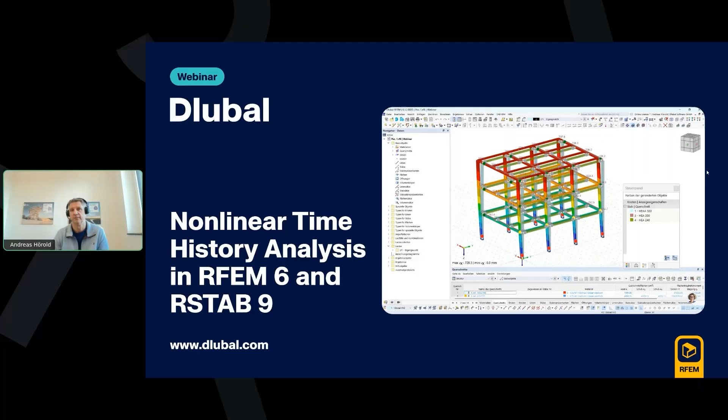The topic of today's webinar is nonlinear time history analysis in RFEM 6 and RSTAB 9. Quite a new feature. Just enjoy the webinar.

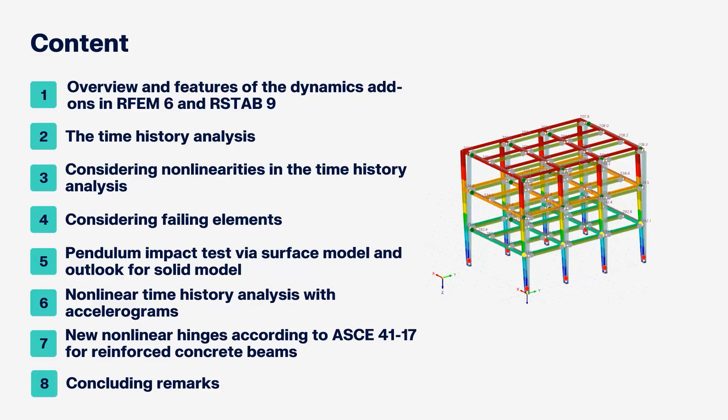So let's go right away with the introduction and overview on our features. Well, we have the modal analysis add-on, which gives you the opportunity to investigate modal properties of our systems. For example, the modal frequencies or the modal eigenshapes and modal masses in general, all that stuff. Followed up, there's the response spectrum analysis add-on.

Well, it just creates states of the system according to an eigenshape, and the states have internal forces and deformations, and we will get these results for each shape, and according to the standard they will be combined, for example with a 100%/30% rule, CQC rule, or SRSS rule. Well, the 100/30 is more for the directions, but in the end, we will get an envelope of internal force results, which can be used further for the design.

Then we will go into the first nonlinear analysis, which is the pushover analysis. At first it looks quite complex, but the theory behind it is, well, quite simple. It's two parts. The first part is just we will get the force-deformation curve of the system under horizontal load. The analysis is quite simple. We just press the system from one side until it either reaches a wanted point or it breaks.

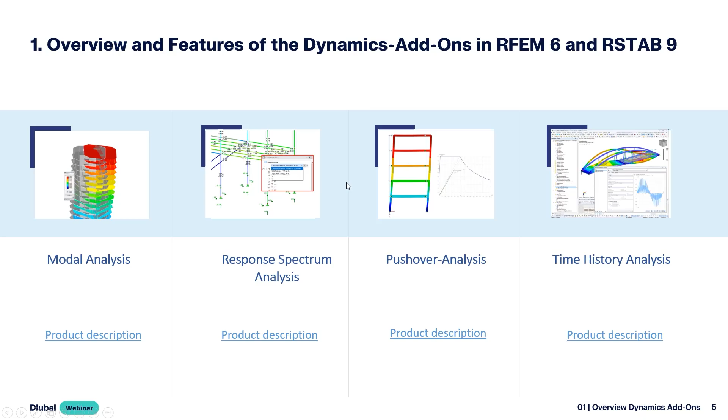We're going to start quite simple. Let's go within our program. The first thing is we're just going to validate that simple nonlinearities are considered within our new analysis type. Therefore, I prepared a simple model. It's just a column, a reinforced concrete column with, I think, 30 times 30 centimeters, 5 meters long. It's fixed at the bottom, and also we have two cables, one at each side.

And this is what we want to verify. For the masses, we have the self-weight of the system as well as one kilonewton force on top. That will be our mass matrix. And for the loading, we have 100 kilonewton, which we will apply with a simple sine function of 0.5 times t. So in 10 seconds, it will just go one time to one side and one time to the other side. What we want to verify is that the cables will fail if they are under pressure. And that's the investigation we will go for first.

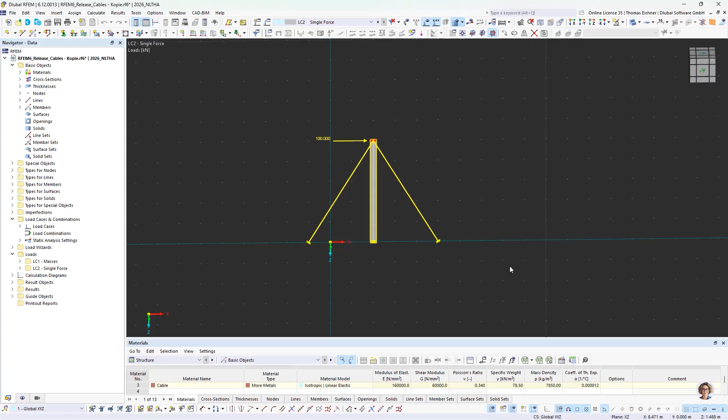For the investigation, I also want to show you what is needed for these nonlinear time history investigations. And that's quite some present, I would say. Let's go for the base data. For our add-ons, there's nothing selected yet. And if we want to go for a time history analysis, we don't care if it's nonlinear or linear. We're just going to press the time history analysis button. Well, the modal analysis is always needed as soon as you want to do anything with dynamics in the program.

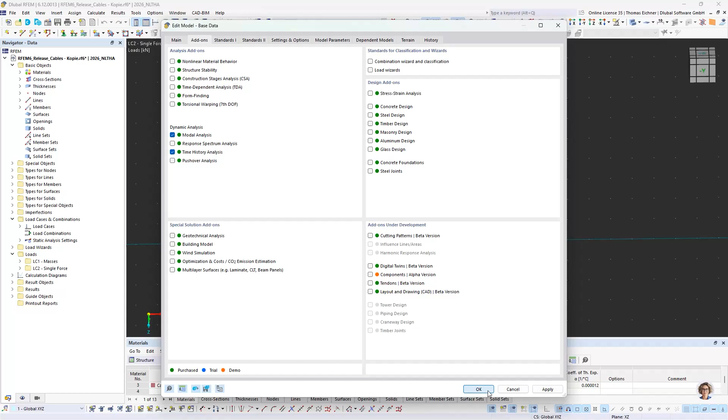But yeah, what you can see here, we don't have another add-on implemented. We also didn't change the price of this time history analysis add-on, which means if you already purchased the time history analysis previously, you're just gifted with the nonlinear solver. Also, if you would buy it now, there's no change in the price for it. So feel free to get it as long as it is like that, because that's quite a gift, I would say.

Okay, let's go out of it. We activated the time history analysis. And now we will go for the first step. We will go for our load cases. So there are the same possibilities as in the linear time history analysis. We can go for load cases or load combinations of the type time history. So let's go first with a load case of type time history. I'm going to copy this load case two, so I will also have the loading within the load case. Then we will change it to a time history time diagram. Let's name that load case time history analysis time diagram. That's quite cool. And okay, so there it is.

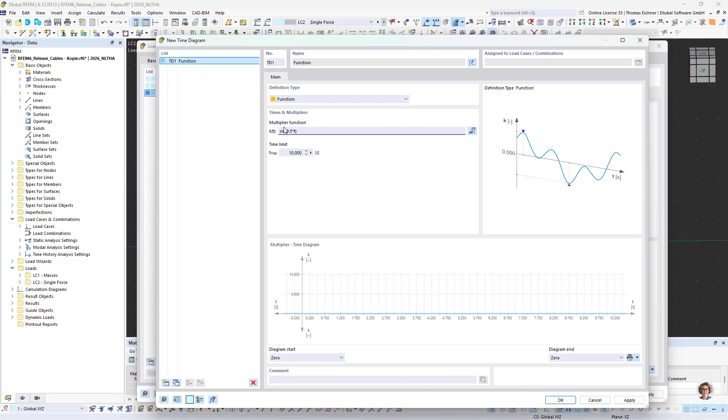We can select that. We have our masses already selected here, and we can go for our time diagrams. Well, that's quite simple. We will go for a function time diagram of, well, what's that? It's sinus 0.5 times t. Always consider only using points here and not commas. Commas are used for other functionalities in this function. But yeah, we will go for 15 seconds here.

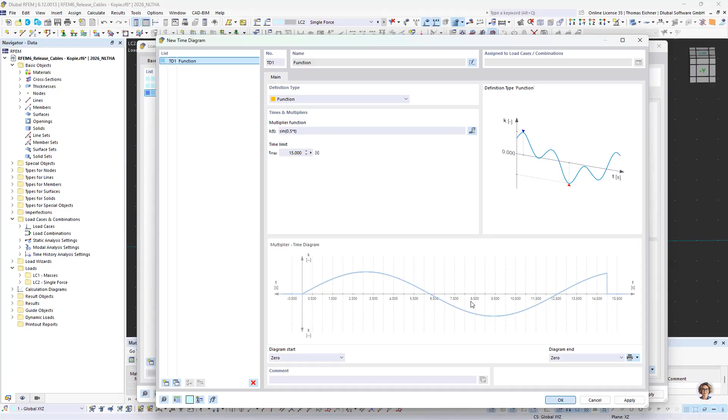So we have all there, I think, but we will only calculate until 13. That will be enough. Whatever. The time diagram max limit will be 15 here. So we have two, both here, one in each direction, just for the verification then. Okay, there we have it. This single force load case time history analysis time diagram. It's a long name. Let's delete that.

Okay, now we will go for our time history analysis settings. So maybe just one benefit here. Let's set the linear one first. So let's see, we have the linear with 13 seconds. We have a time step of 0.1 seconds, which is saved. And the saved time step, we will split it even further by 1000 steps. Since we also have cables in the systems. I think the basic division of members is 10. So we have 10 divisions for members, and cables make it quite, let's say, unstable. So we will use quite some time steps in that case.

For the calculation parameters, I don't really care about the rest. We will only go for the x direction here, and that's all. We can stay with the consistent matrix, even though it wouldn't make any difference with the diagonal in that case. Then we will go for the damping. The damping, well, I just selected. There's not too much physical meaning behind it, but I can try to get a physical meaning out of it. Let's say we have a frequency of 100 Hertz. I'm not sure if the system has an eigenfrequency of 100 Hertz. I have no clue, but let's assume it has a frequency of 100 Hertz, which would dominate the structure's response. So I want to dampen this frequency by 10%. It's quite some high damping, I would say, but that's the thinking behind inputting that value.

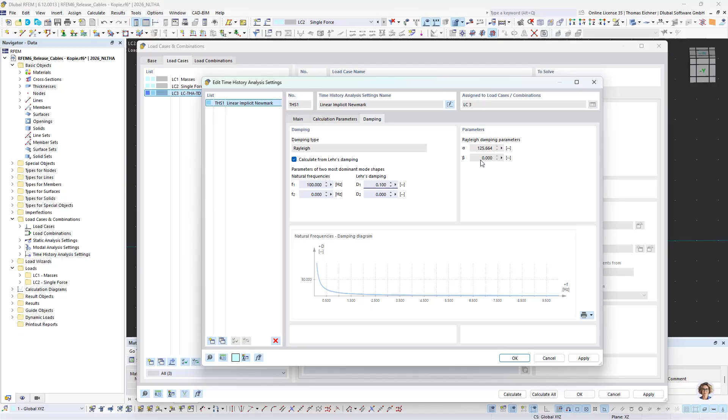Okay, for the beta damping, I try to avoid it, to be honest, since it often causes convergence issues currently. So also maybe a tip for you, if you get issues with a time history analysis, with a nonlinear one. In the linear, it's no problem, but with the nonlinear one, try to set the beta value to 0 and try it again, and then you can investigate the results, and then you can adjust it. That's always a first support step I do at customer models. Okay, but that's it. It's already done here.

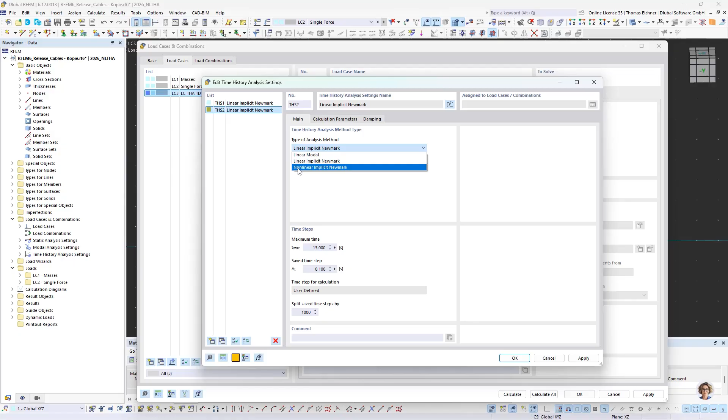What we will do next is we want to do a nonlinear time history. That's all we are talking about today. And it's quite simple. We have the linear settings done. We just copy it and we just change the solver to the nonlinear implicit Newmark one. And it's finished. So that's quite straightforward and simple. If you have some systems to test it, just try it out. But also maybe try increasing the time steps as well and play with the beta damping as well, please. That will help a lot. Okay. Now we will just accept it, and I will just directly select this nonlinear solver for this load case.

For the next load case, I want to go with a time history analysis of accelerograms. So with that, also the nonlinear solver, also the same masses, we can select an accelerogram from our library, like anything there, Chile, I don't know, what's that? Let's go for some 16 seconds. That's okay. Let's go for Valparaiso aftershock. Okay, for the Chile earthquake. It's quite small. That's okay. Just going to take it, just to have some accelerogram time history as well in that calculation. Okay, and so with that we have all possibilities of the load case time history analysis.

Now we also go for load combination time history analysis, and that's like my favorite. I'm almost only working with those load combination time history analyses for time diagrams. They are not available for accelerograms, but for time diagrams, I almost always take load combinations. The thing is, we can just do more with it. Right, the load cases are okay, but we can only assign one loading with one time diagram. In the load combinations, we can do the same, but we can also add another loading with another time diagram. So in the end, this is the same as the load case time diagram time history. And that's the same setting right here. We just have one time diagram and one load case assigned.

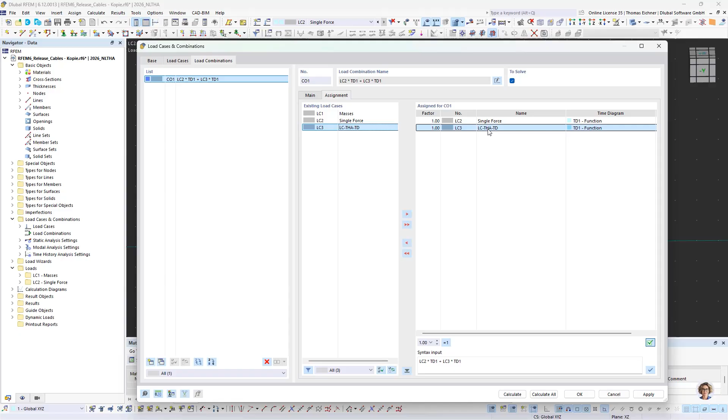We could also go for this direct. We could use that, and it's automatically filled with the right time diagram that is used in this load case. But we don't need that. Okay, so here we will go for the differentiation. We will make one for the linear time history analysis, and we will also go for one for the nonlinear one. So let's call it COTHA time diagram.

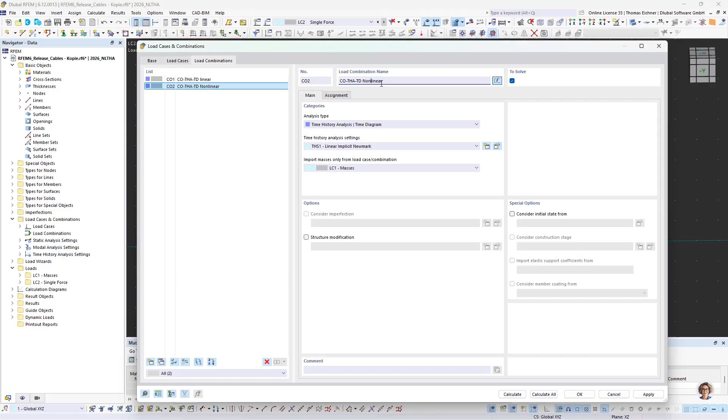Linear. And the second one will be the same but nonlinear, and we change the solver there. And well, quite straightforward, that's done. Let's just calculate it.

And since it's gonna take 3 minutes and I really want to show you some stuff today, I want to just first show you we have 4 time histories. They are all done at the same time, calculated at different cores. That's a difference to RFEM 5, where it would all need to be calculated one after each other. So it's quite a ton faster than the other variant. However, I really don't want to wait this long. Let's just switch to my prepared results model. I also prepared all the results for our further models since it's needed.

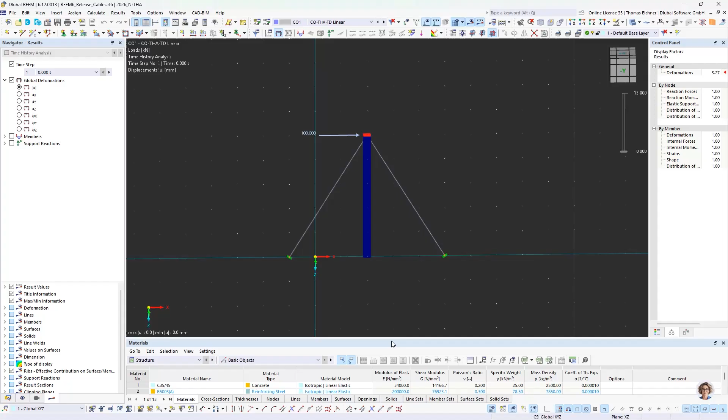Let's go for the results of this time history. We will start with our load combinations linear one. For your information, the best way to investigate the results is either using these calculation diagrams, which I prepared here already. For example, we can see the maximum deformation in the graph. Just select the time history analysis here, so you can have the result type time here.

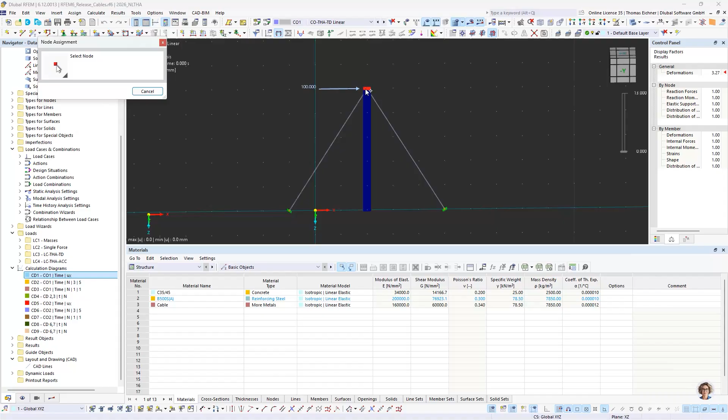Let's go and create a new one for, let's go for the load case 3. No, we want to have the linear load combination, just as an example for creating those time diagrams, those result calculation diagrams. We will go for members, internal forces, normal force of this cable. So the thing is, we wanted to see if it's failing. And since we are in the linear time history analysis, we see it's not failing. It's first gonna take tension force, and then it's gonna take pressure. So the pressure is just wrong. It should fail here, right? And that's the thing. But we will go for a different investigation now.

Don't need to change this. No, don't need to save this. Let's go for our calculation diagram monitor, which is right there. That's a cool thing. We have the same diagram. We have the possibility to show one calculation diagram while we are in the program. And also, if we now start the animation, we can see it right there. It's also going to show us where we are at. And there you also see the normal force of this cable right now. Well, it's just gonna hold it completely with tension and pressure, and that's wrong.

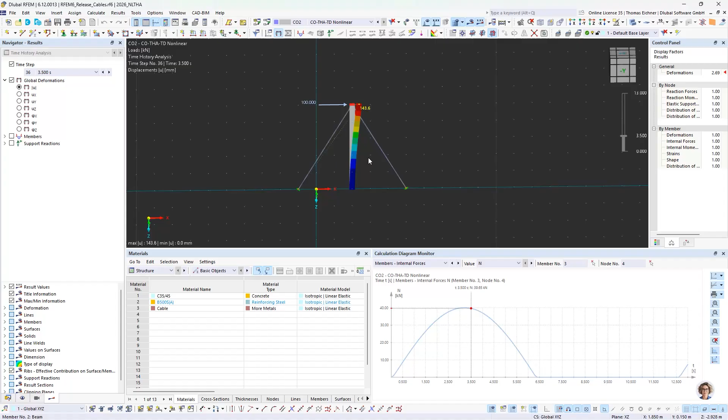So now for verification, quite simple. I'm gonna select the load combination 2, and there we have it. There's only tension force, and it's failing at the pressured region. So let's start the animation on that. We also see it's running quite better here. We also have way different deformations. Well, not way bigger. I mean, in the end, it's still fixed. It's still a column here, but yeah. That's the validation there. Validation is done already.

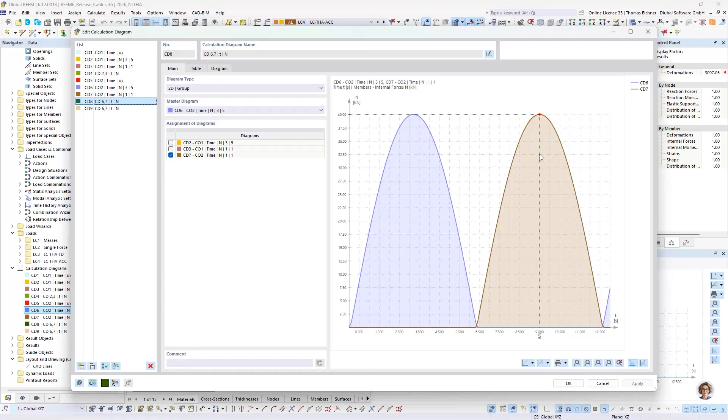We can also go for a short second. Let's see at the load case time history analysis accelerogram. We also see here there's only tension forces, never negative normal forces in the cable. So confirmed again. One more thing I want to show you. Let's go for the load combination 2. This is the normal force for the left cable, and this is the normal force for the right cable. We see it's working as estimated. Also, we have another thing, and it's called the group diagram, where we can combine now this diagram 6 with the diagram 7. So the normal force of the left cable with the normal force of the right cable. And that's quite handsome.

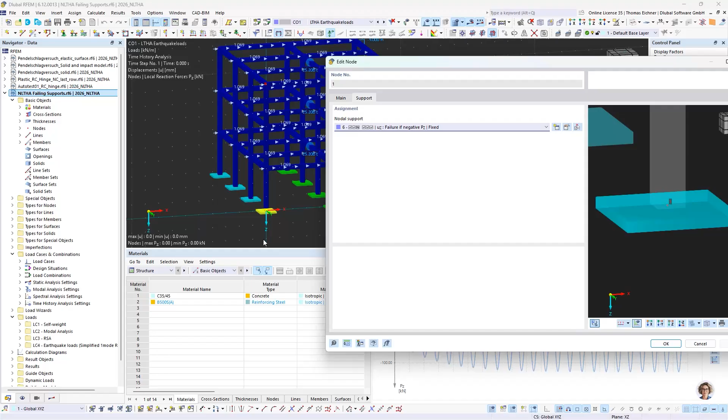Okay, so first investigation done. First non-linearity is successfully confirmed. Let's go for the next confirmation, and that's gonna be some failing supports. Here you can see I just prepared a model which has fixed supports, but it has failing supports if the force is pulling up. So if this Pz is negative, then the support fails. Quite straightforward here, and we already see the results of the linear time history with the results of the support force at this left corner here.

We see the loading. Well, there's just one fail I did. I have two loadings that are a bit different, but it doesn't make a big difference. It just is a bit not anti-metric because of that. Let's see how it's going. I'm gonna start the animation, and we can see now the supports always take support forces in both directions, as also stated in this diagram.

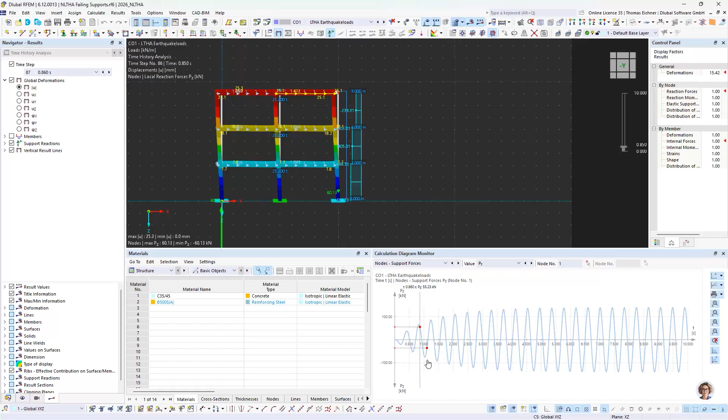What I did here is I just used time diagrams. I did quite some theory crafting, I would say, on this model. What I did is I just used the first mode. So the first mode of the modal analysis is used here. It's the 15.236 rad per second. So it's not the natural frequency, it's the omega of the first mode of the linear system.

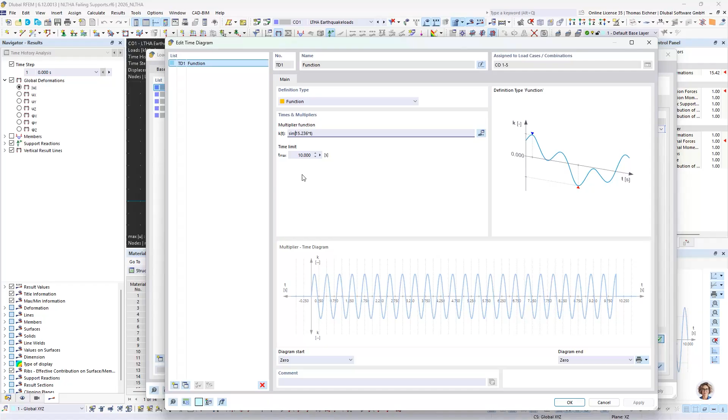I used it here and just applied the loading. I just applied the masses in x direction. That's what this time history does for linear and for nonlinear. So the same I did for the nonlinear time history analysis.

So let's see here. As we see, it's just like opening up. I also included some damping. So we see it's just like rising. It's always starting up, and then the damping comes into place, and it stops rising. I'm just missing a word for that, but that's no problem. I think you know what I mean there.

So let's switch to the nonlinear time history, and we would estimate, there we see it, we would estimate these forces only to be positive. Let's go and see it. Yeah, and there it is, only in one direction. Here it's shifting. Here it's shifting.

Okay, we're gonna increase the deformations by 100, to see quite better. Now we see, it's lifting up, and it's going down again, and then this side is lifting up. So the nonlinearity is confirmed by that investigation. And now we can continue with, let's call it, the good stuff. For the good stuff, we have the pendulum impact analysis, or simulation in this case.

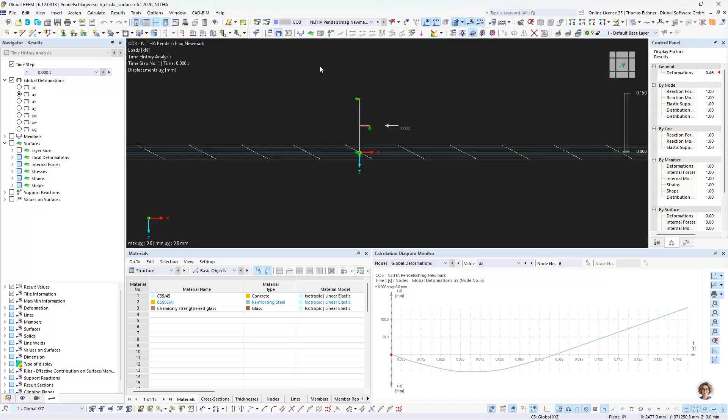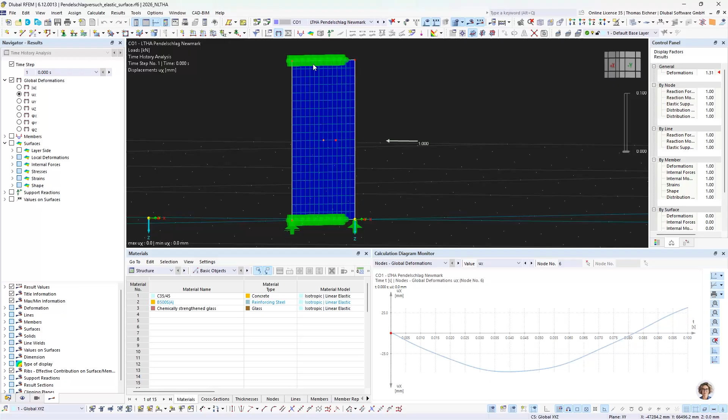Now I want to go, let's see here. Okay, perfect. Let's see first about the system. What we have there should be a glass surface. It's just one surface. It's a chemically strengthened glass, 8 millimeters of thickness. We have 1 meter height and 70 centimeter length. And we have it supported on top and the bottom with line supports.

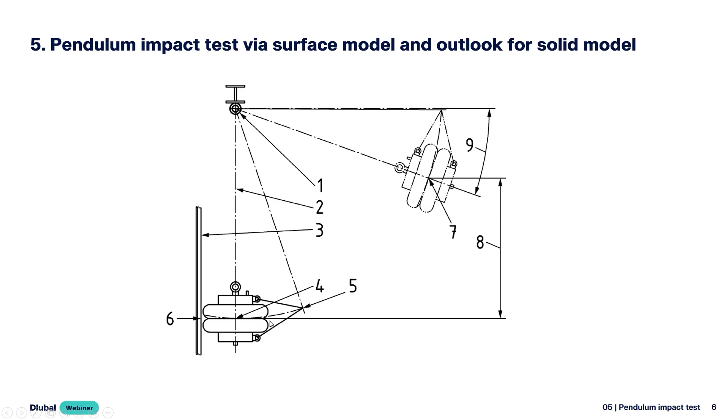And the real procedure is we would have it hang up here, lift it up, and then it would be let loose and it would bang against the surface. It would just bang and then it would go back again. It wouldn't go there and then go there again and again. That's not what we want to simulate. It would just bang once, get away from it, and then it's away. That's what we want to simulate. So for the energy, we will see this in the results in the end.

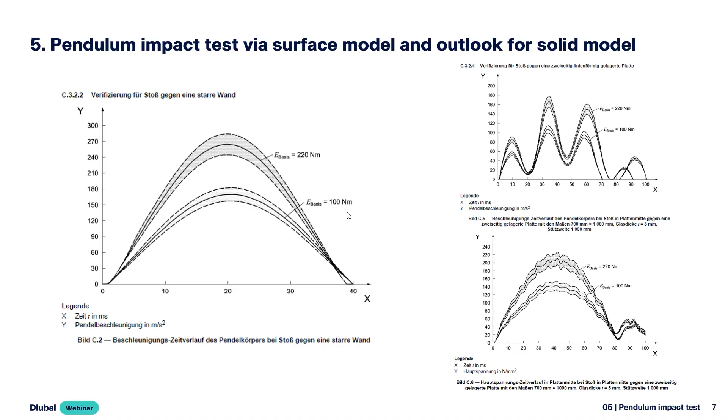However, what we can see here is we will go with an impact energy of 100 Newton meters. So what we want to have is at the impact, we want to transfer 100 Newton meter energy. So how can we achieve that? Well, we know we have this impact system which has 50 kilograms. That's the mass of the impact body. I think it's a tire which normally is weighted with a medicine ball, something like that. So that's the system, it has 50 kilograms, and it has roughly a stiffness of 400 kilonewton per meter. That's also gonna be in our stiffness there. So now we know the energy of 100 Newton meter.

With that, the law of conservation of energy, together with the impulse theorem, we can calculate a force F. I left out some intermediate steps, because the force F can be derived from the impulse change over time. So there are some formulas missing in between, but that's what's behind these formulas. The time which we do take, we just pick it. We decided it's 0.001 seconds. And with this 0.001 seconds and this derived formula, we can have the force that is needed to achieve this energy.

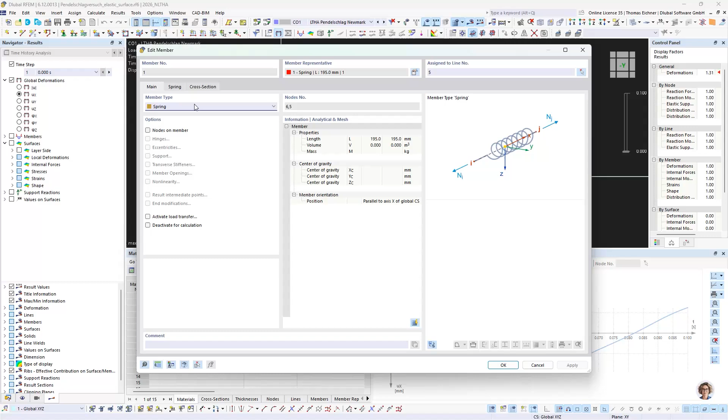Then we have the system of our tire, in this case a really simple system. It's just a spring, and the spring has a stiffness of 400 kilonewton per meter. It has no mass itself. We defined the 50 kilograms in our mass load case on one side. And we have a partial activity, which means we can insert a slippage of 1 millimeter. So that's the distance we need to accelerate to this 2 meters per second.

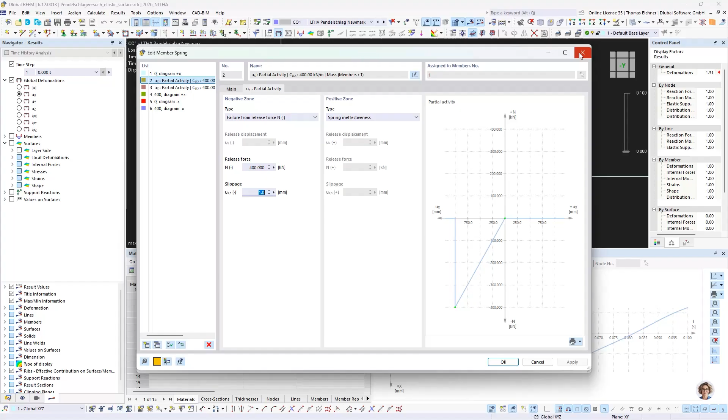And we also have a spring ineffectiveness in the other direction. So it hits, goes with the structure there, and if it goes back and is not linked anymore, then it's ineffective. That's how we make sure that it goes away after the impact. Okay, that's quite straightforward, and that's it already. Now we can go for the results, which I already calculated.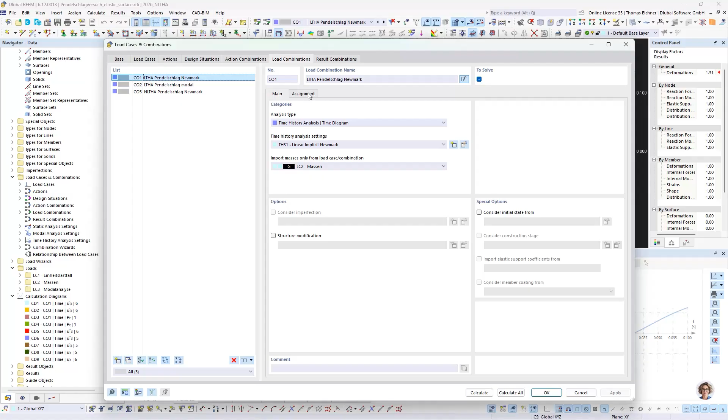Maybe we can go also for our time history analysis settings. As I said, we have the masses defined in our mass load case 2. We have our unit load case with 1 kilonewton. Now we will go for a load combination; they are all the same. The only difference will be the time history analysis solver. So we can look at the assignment. We have our unit load case, which has 1 kilonewton, and we assigned it with our Pendelschlag, which is a pendulum impact in German. There we have the 0.01 seconds, and we have this multiplier with 100. So that's what we do there.

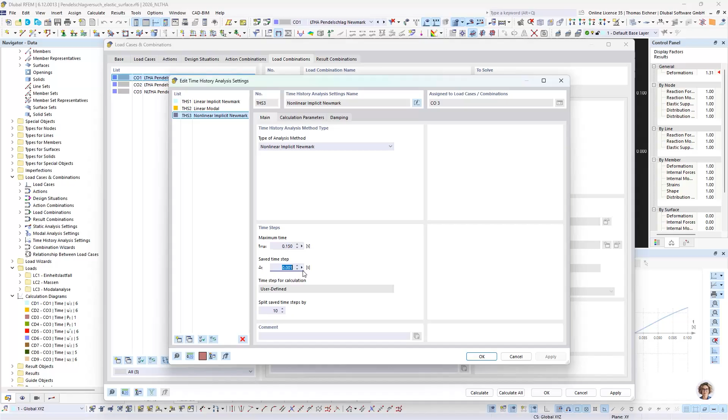Okay, done with that. We can look at our time history settings. In this case, I always picked the time steps and splits the same, but we don't need such precise ones for the linear one. However, I just picked them the same. So now we calculate times 0.15 seconds long. I think that's different, yes, I did it longer for the nonlinear time history. I will show you why. We have a saved time step of 0.001 seconds, and we will further split it by 10 to have more calculation time steps. For the calculation parameters, it's a diagonal matrix with all components.

For damping, I think we don't have any damping in this case. I didn't go for damping here. We could also try to estimate some damping, but I didn't try it yet. Okay, but with that we are done already. The modal one we can just ignore. We won't look at that. It's going to be the same results as the linear one. It just needs a modal analysis first.

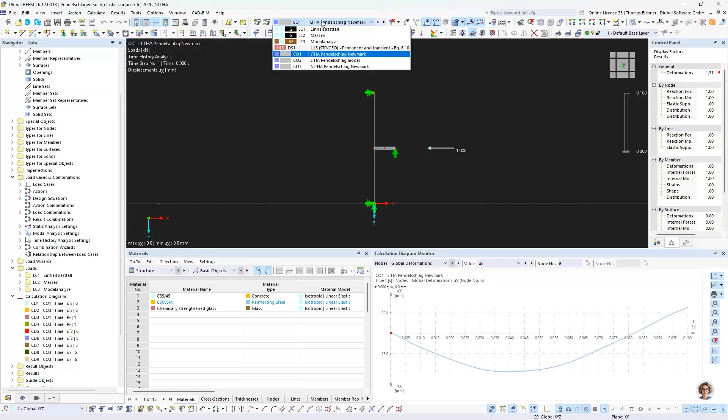Let's go for the results now. We will see the linear one, and let's see, this is the UX of node 6. Node 6 is this one here. Let's just start the animation. I will override it a bit so we can see more. Let's factor it with 5 and start the animation here. Now we see it's going to make the bang, and then it's going to rotate a bit.

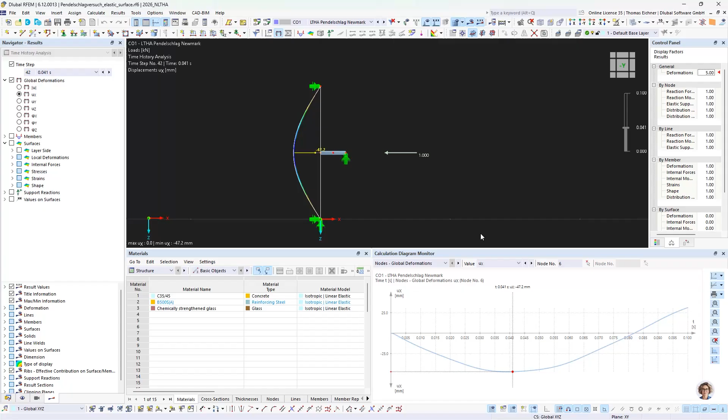The thing with the linear one is that our spring nonlinearities are neglected. That would mean it would still be connected in the end, and it would shift sinusoidally. It wouldn't be split after the impact. So this would just go up and then down again. For the velocity, maybe let's go for our time diagrams.

There we see it. We see our almost 2 meters per second, which is a bit off since we also don't have this 1 millimeter slippage. It doesn't have too much influence, to be honest, but it's just a little bit off because of that. Also, maybe a more precise time step would also help a bit.

But what we see here, we go and there it should stop. We know this negative way shouldn't occur. That means the ball comes back again, kind of, and that shouldn't be. It should be constant here. So it's not disconnected. This means it's connected with the surface and it's going to be pulled back by the surface. That's not wanted. Now we're going to look at our nonlinear time history.

And there we see some difference. It's not going to go this sinusoidal way. I mean, okay, it's 0.05 seconds longer calculated, but we also see here some change. It's not linear, right? If you change it for the nonlinear one, we see it's just linear at that point. So the deformation of that right-hand side point is just rising, meaning this pendulum is just going further and further away with the same velocity.

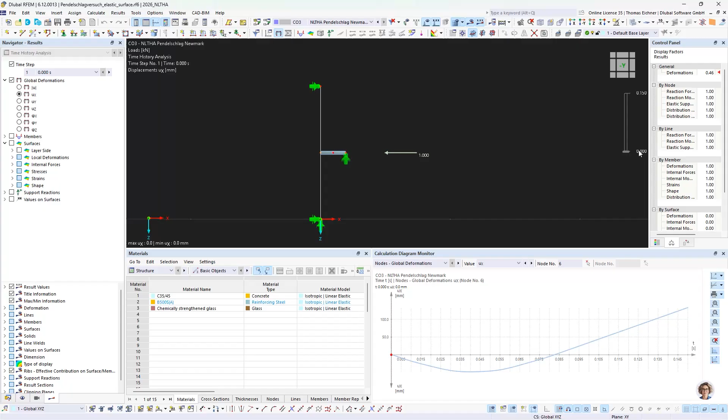We can also try to get this other point on the other side. Let's go for this. That's the point on the surface. There we see how that is going, right? It's not going further away, it's just vibrating in the end, the surface alone. We can also try to get it on the linear time history. Yeah, there, that point, well, it's connected. It's not right, to be honest. It's quite hard to interpret in that short time. Okay, let's stay with the nonlinear one.

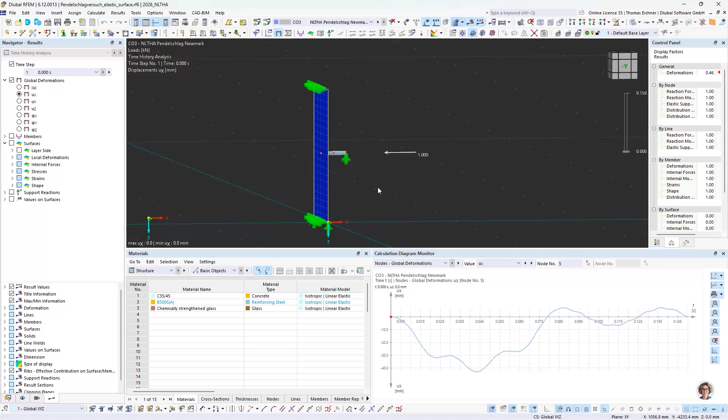And with the nonlinear one, I will stay inside that point. Let's go for node 6. Let's go for the velocities in that point. And we will go for ux, and there we will see this 1.99. It's quite close to 2.0 meters per second. That means our first theory was confirmed. We have this impact energy of 100 Newton meters, since we have this 2 meters per second. And what we also see is this constant velocity in the end.

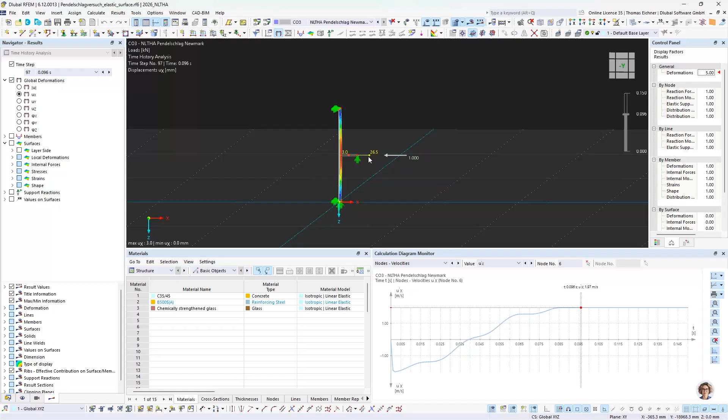That means at that point, they are not together anymore, and the system on the right-hand side, the pendulum, is just going to travel further and further to the right. Let's look at it also. Let's do it a bit bigger. There we see it. Now it's kind of together. The stiffness plays a bit of a role in the difference here, and then we see it's going to move. And yeah, it's working quite fine.

We can also change the animation speed here a bit, so it's a bit too fast. Well, now it's not fast enough. Let's go here. Yeah, that's a bit better. There we see the stiffness just has some impact here for the relative motion between those. Now it's going to shift and just move away. So that's confirmed again. So let's jump to the next model.

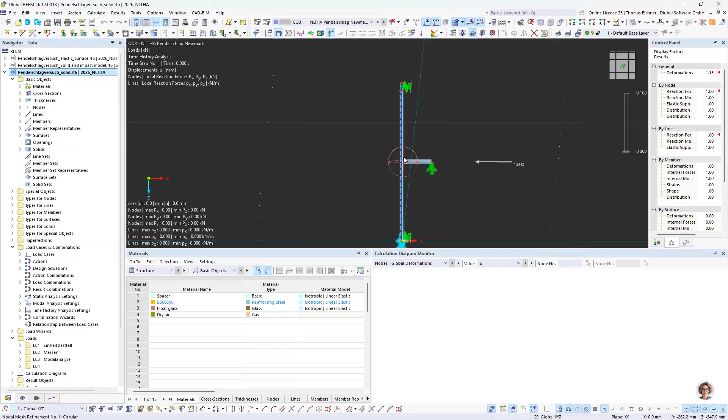It's the same model, but it's cooler. Now on that model, what we did is we included, in that case, double glass surfaces on both sides, and in the middle we have air as a solid. So this is the solid model of this structure. It did need some mesh refinements here, and I did some iterations for getting the results as they are now. We will just go straight forward, and we will go for the nonlinear time history analysis,

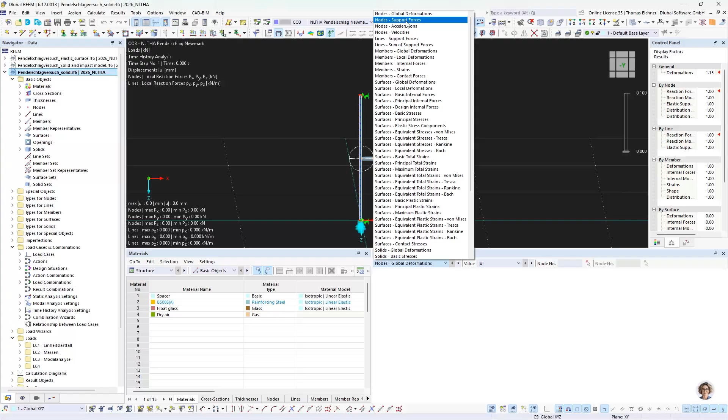and we will go again for our velocities on the point. And we will see quite the same. You see, in that case, it's again only calculated till 0.1 seconds, not till 0.15, but we see how it's not changing at that point anyway. So that is also working quite fine. We also have this 1.99 meters per second, so that's quite nice.

Let's go for the animation in that case. We also see how it's moving the whole body here. This whole solid model is going to be moved and it's going to go back. We see this behavior is a bit different to the surface model, especially since this is way more stiff. Okay, and it's just for presenting you. It's quite a powerful analysis type.

What I want to say here anyway is we do not have everything in our automatic tests. We have warnings implemented, but just because there's a warning, we didn't want to block features. Let's say, for example, surface contacts with whatever nonlinearity. We don't have an automatic test for that yet. So we just want to point out what is within our automatic tests. Whenever there's something not tested, you will find such a message here, but it doesn't mean that it is not working.

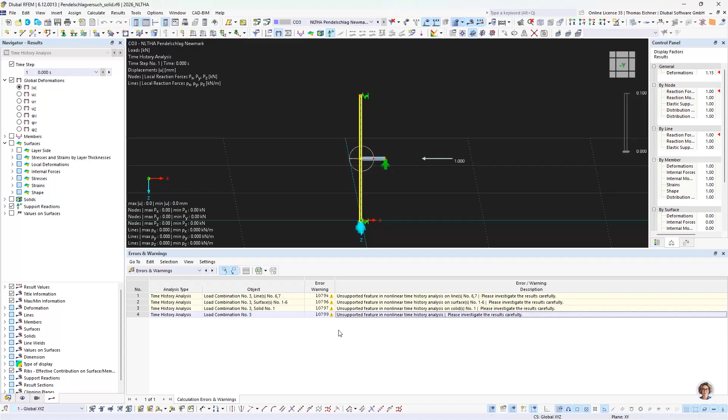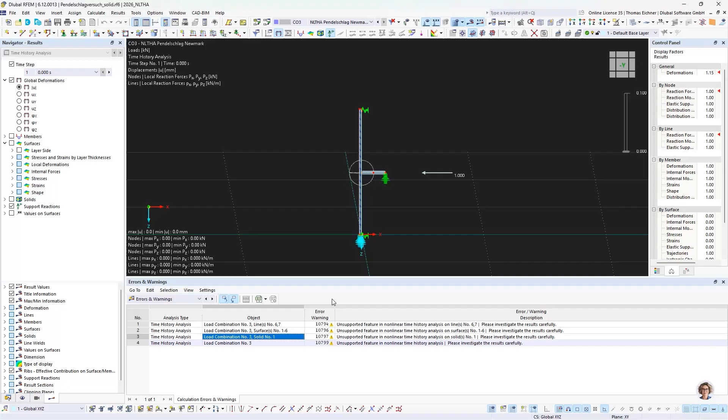That's just to hint: don't trust a program blindly, right? I hope most of you understand that. So for that we also implemented where the feature is untested. For example, here we have the surfaces, or the most simple one is the solid, of course, because we didn't test the solid yet in an automatic test. We just tested it on its plausibility like that.

Also, for example, there are overall warnings. Imagine you are trying to use a torsional warping 7th degree of freedom with nonlinear time history. Nope, that's not tested yet. I'm not sure when it's going to be tested, because that would need some new studies, I would say. So there is a lot you can combine, but please investigate them carefully.

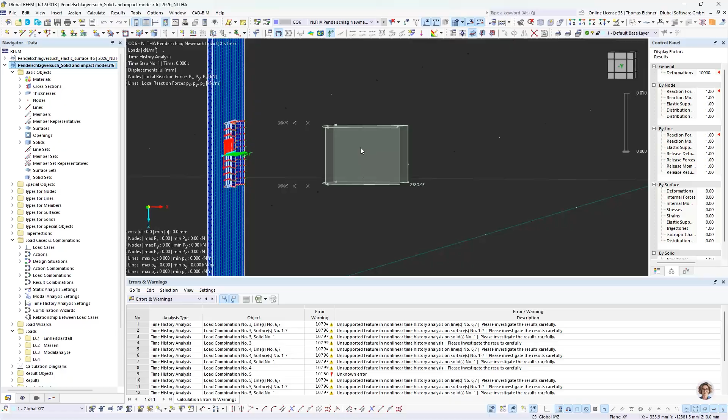So, and now for the last of this pendulum impact stuff. I didn't get this to calculate quite far. Yeah, it's still getting my assert here for the changing. That's something where I tried modeling this contact more exactly. In this model I tried it with our rigid link, which is a link between two lines. There's another test where I tried it with single links at each node. It worked a bit better.

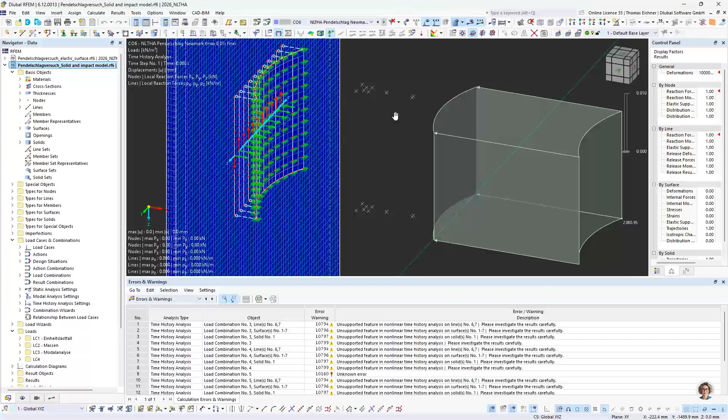Well, to be honest, I don't know if it was better. I just investigated it in more detail and with more complex mesh settings and time settings, but that was an iterative process. What I can say is that 2 elements don't seem enough in between those, and the time settings also seemed not enough for this detailing. Okay, so I hope this was a fun bang into this year.

And now let's go further with our performance-based design. Let's see, do I have another? No, that's not it. That's a jump too far. Let's go for that here. We will now go for, I want to show it in RSTAB 9, since in RSTAB 9 we also have something different there. We have a different solver than in RFEM 6. So in RSTAB 9 there's this nonlinear explicit one instead of the nonlinear implicit one.

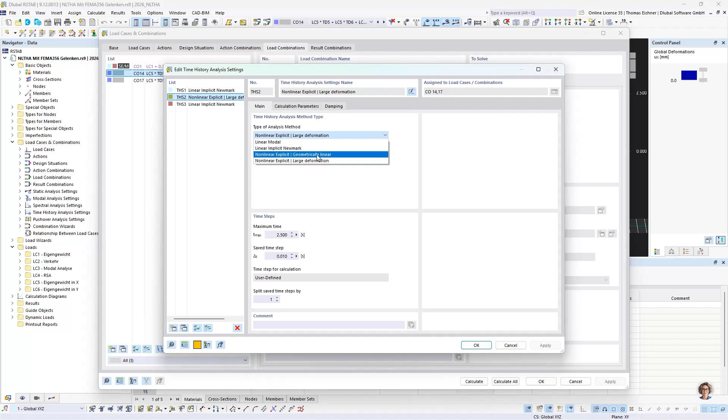It's 2 solvers, one is geometrically linear and one is with large deformations. And as a hint, even though it's called nonlinear explicit, it has some benefits within the solver which relate to the implicit Newmark one. So it's not purely a nonlinear explicit one, but that information is not completely clear to me. It's going to be in the handbook, so please feel free to look at that there. What that helps with in the end is where other solvers would get unstable, which I will show you right here.

For your information, this model is related to the performance-based design topic, where we try to do nonlinear time history analysis, mostly for earthquakes. Just as information, I didn't use it here, but you can always use structure modifications to modify stiffnesses and everything, to get from characteristic values to estimated or mean values or to correct values and so on. You can also use it for your modal analysis. So this feature is completely there for you.

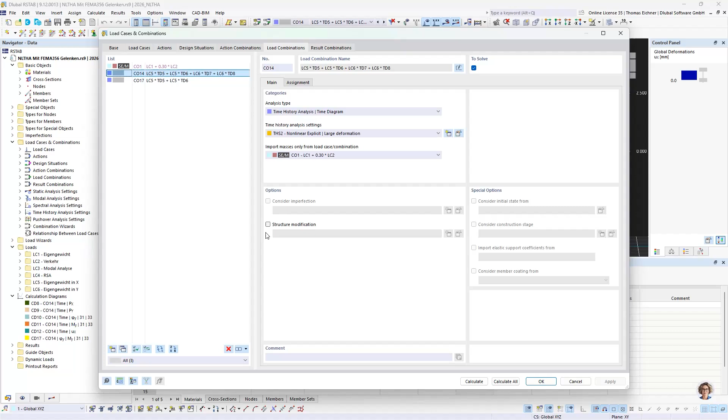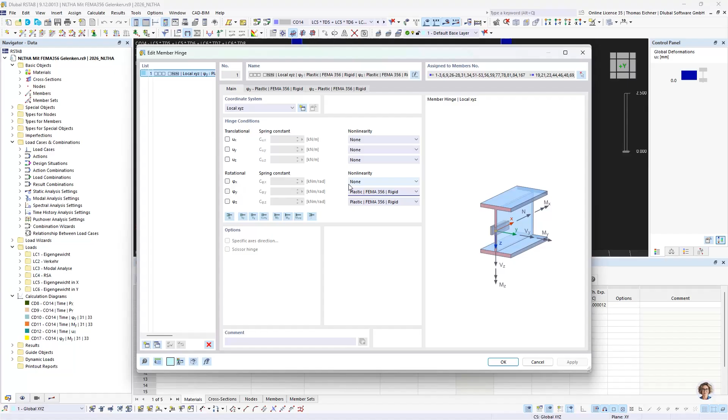Then for this feature, there are also hinges. There are nonlinear hinges in this case. In that case, I just used the FEMA 356. Later on, I'm going to show you the new ones, this ASCE for reinforced concrete beams, according to 41-17. In this model we use the FEMA hinges. We also see the acceptance criteria and so on. You can also define everything user-defined if you want to. And also the coloring there.

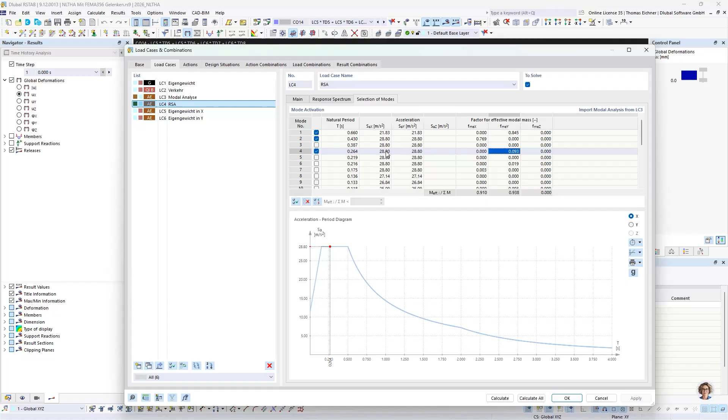Let's see, we will just go for a nonlinear time history. Well, that's the model where I did some tests, let's say. What I did there is I did a modal analysis, I did a response spectrum analysis, and I got this information of the modes. So I did a nonlinear time history in the end where I said 0.845 times this acceleration of the first mode I will apply with this frequency of the first mode, and then I will also use this mode with 9.3% with that acceleration and that period and so on. Let's look at what I mean here. Here you can see it. I used the self-weight in X.

I said it shall be taken with the frequency of the first mode. Is it the first mode? No, this is the first mode. Well, the first X mode, and I scaled it with the effective modal mass of that mode and the acceleration of that mode. So that was my try to compare those analyses with each other. It wasn't that successful, to be honest, and I will investigate further for sure. But that's the analysis we do here.

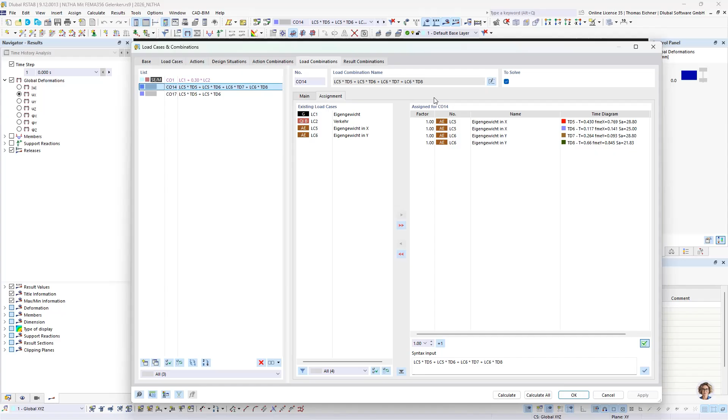We have like 2 frequencies in one direction, 2 frequencies in the other direction, and we will just go for the comparison. I think for the RSA there's a Q factor of 1.5. I didn't take that into account in any way, so that could be one of my mistakes. But yeah, let's look right into the results.

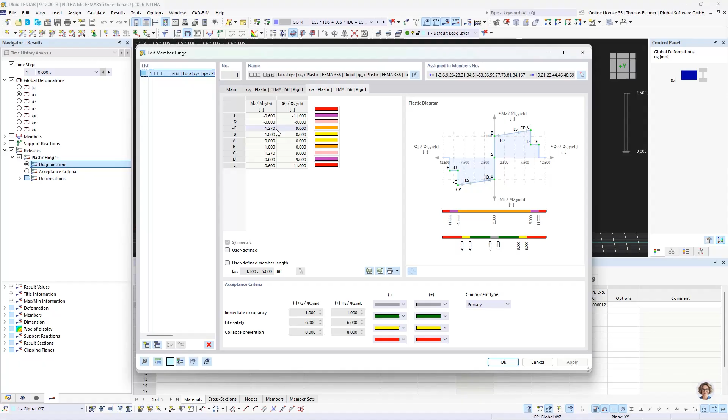We can start the animation, and there we will see how it's gonna go for the left side. We can see the acceptance criteria here changing. Maybe for the results, we can decide if we want to have the acceptance criteria or the diagram zone. I will go for the diagram zone. If the diagram zone gets red, then this hinge completely broke. If it's purple, then it's still in 20% or something of its capacity, or 40. Not sure for the FEMA currently, for the steel. It's 20 for reinforced concrete at least. But yeah, let's go for that and start it there.

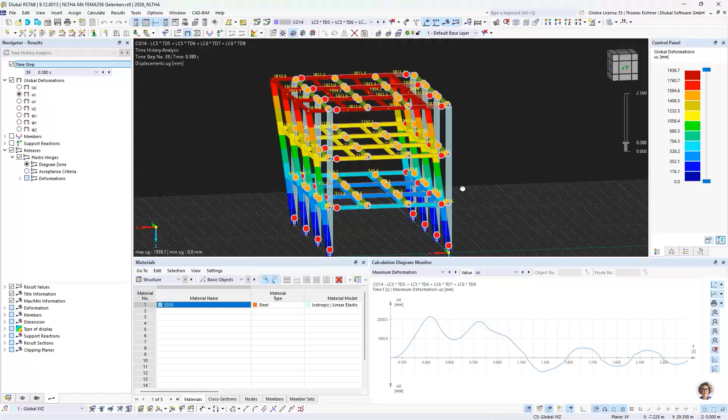Now we see there it's red, that's red, red, red. And that's the moment, the 0.38 or something was that. Well, we can also go here and see the overall UX deformation. Here what we see, the hinge is broken, this hinge is broken. Every hinge in the system is broken. Am I right? Everything broke. Yeah, I'm right. Everything broke there. So that's where the system gets unstable for some solvers. That's that situation, 0.38, for example.

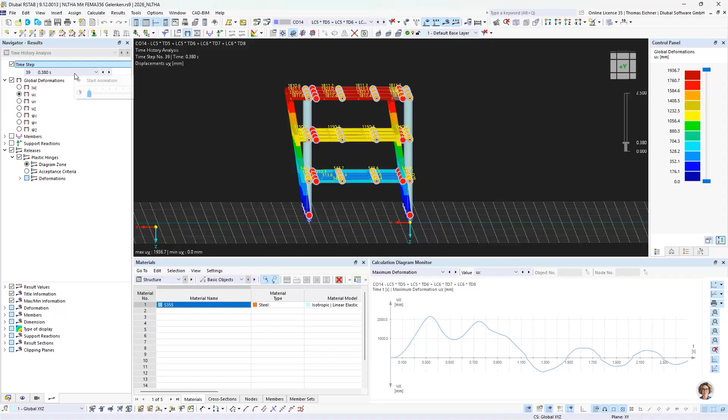But with this mix of solver, we can have it kind of moving free anyway and still capture the movement. So that's a benefit of that solver type. Well, and then it goes back. And it's gonna go, yeah. I think the figure explains itself at that place, and I don't really need to explain further.

Exactly. Maybe for the cyclic behavior, we don't have direct cyclic behavior considerations there. I don't know by heart. I think it's the normal kinematic one, or isotropic. I don't know it currently by heart. I will search for that afterwards. Anyway, this cyclic behavior is one of our next topics, as well as the initial state topic. So it's gonna follow up.

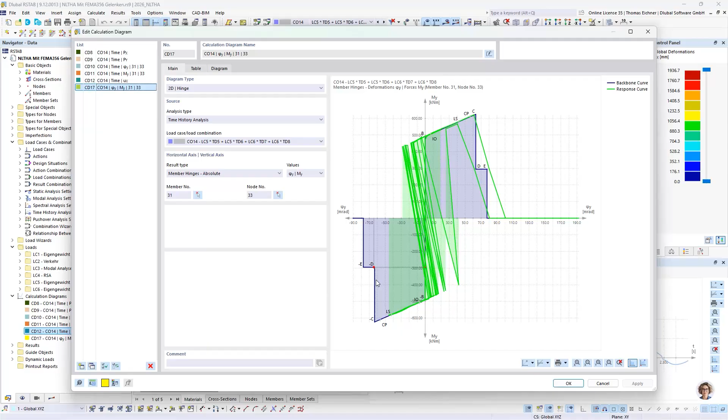Okay, so that's the goal for the investigation for our performance-based design. We can also look at, there we see a bit of our goal there. That should be our cyclic behavior, but you see it's not as I wish it to be yet. In the end, we will have the backbone curve as well as the cyclic behavior within the diagram. That's the plan to go.

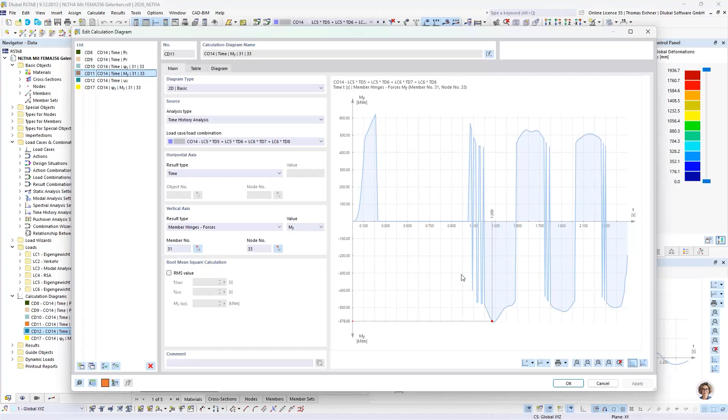What we see here is that the nonlinearity of the hinges is considered at that point, also with the maximum moment. For the hinges themselves, the results can also be inspected within the results by member, the local plastic deformations, and there we have, if it's collapsed, what's the yielding moment in Y direction and Z direction, and so on. So here's all that information for each time step. Also the tables here change as soon as you change the time step. Okay. So, and that's it for this type of performance-based design.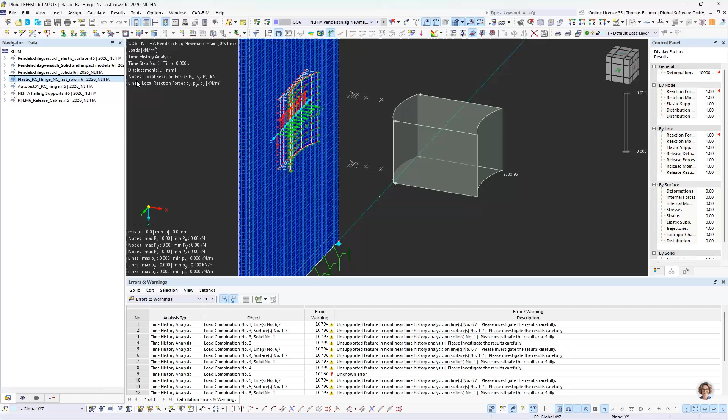Now for the last topic, I think I will leave out how our auto tests work for it, because the time is running out. But at least I will be able to show you that this simple test for our reinforced concrete hinge. Let's go for the results first, because we can currently see the behavior of those hinges only by results. So we will go here. That's the backbone curve of our hinge. We have a reinforced concrete beam here.

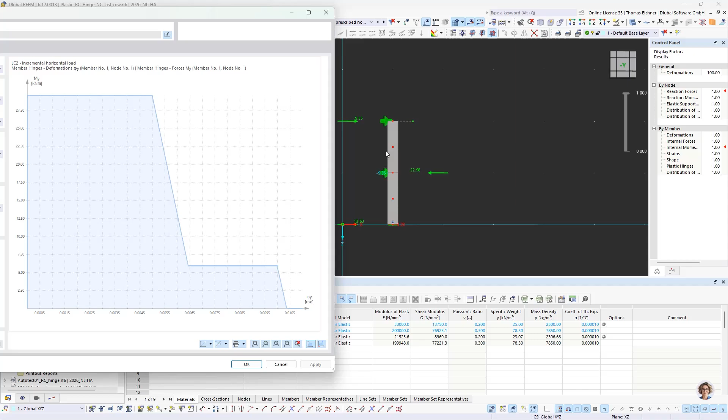I made the analysis as prescribed nodal deformation, so deformation controlled, and I also made it force controlled. But what's this one? It's the force controlled one, but it's also working because I have a nice system for it. Let's say it this way. Here at the bottom, there's the hinge. We also have two supports here, so it will be stable even though it goes further than this point. That's how our solver would say it's gonna be unstable.

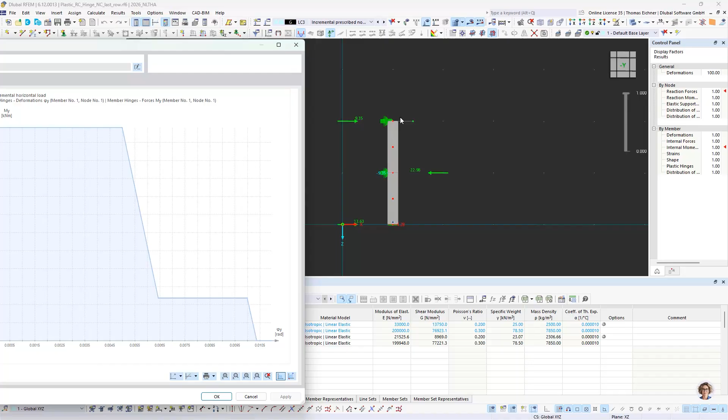Now, what we do here, we will increase the loading on this loading. Okay, wait 1 second. I need to change it for the horizontal load. We have the load on top, so it's going to rotate and it will cause a moment at the bottom here. And this will lead us to this graph of this hinge.

And this hinge, as you can see, the MY, it's about 30 kilonewton meter. It will be shifted at 0.005 rad. So 0.005, we will remember that. There it loses its strength to 20%, and we will also remember the 0.01 rad. There it loses it completely.

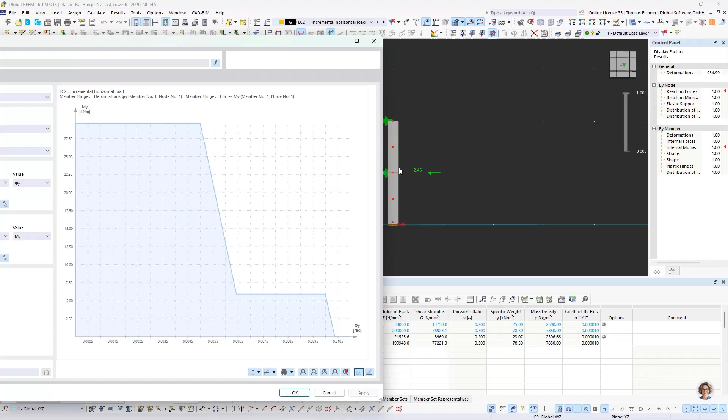So now let's go into this table. At the bottom there's some automatic testing, so I tested it for different scenarios. And on the top right side we see this table for that specific test. We were in the last row here, so we see the A value, which is 0.005 rad. So the A value gives the plastic deformation until it gets to 20% residual strength. And we see the B value, which is 0.01, and we also confirmed that inside the program.

Well, as you can see here, the hinge, let's go for that again. The hinge is just placed pretty simple. We're gonna go for hinges. I'm just gonna pretend that I'm gonna create a new one. Okay, but one important thing for now, maybe this here should be fixed. But I think this is already, it was a bug, but it's already fixed as far as I remember. So this shouldn't change anything anymore.

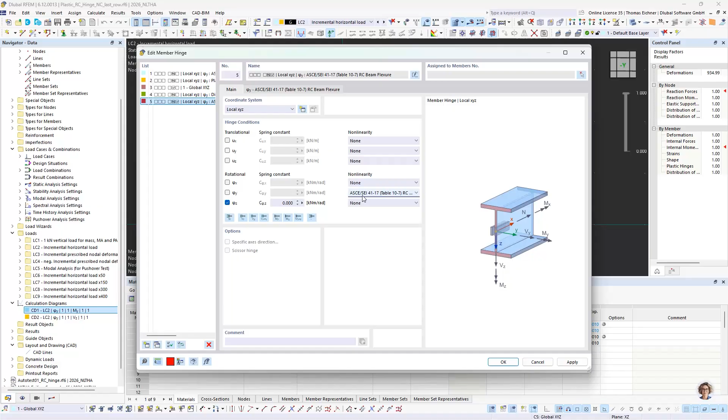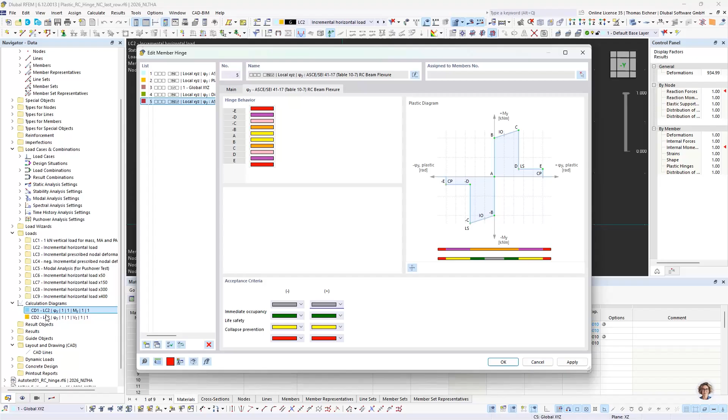But it was previously, it only works if this here is fixed and then you select the ASCE one. So you select this ASCE 41-17 hinge within this nonlinearity, and then you have some information, but not really a lot of information, since the information is only gotten after calculation. That's why all of that information will be in the tables. It's not there yet. Currently, the only way to investigate those hinge results is via those calculation diagrams. Okay, so that's how you set it.

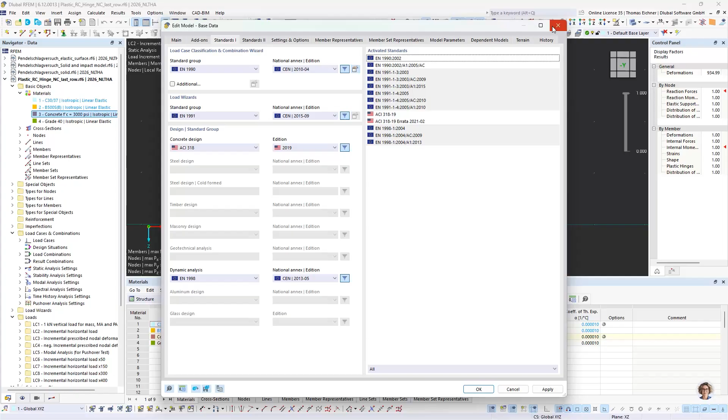One more thing is, it's working for multiple materials. So in this case, we used the ASCE standard. Let's go for the concrete design. You will always need to have the concrete design add-on active and either the time history or pushover analysis add-on active. These are the requirements for those hinges. And for them to work, the materials need to match the concrete design standards. So you can't combine Eurocode material with ASCE standards, because the yielding moment will be calculated from, well, it needs to match. It's the same as the material needs to match the concrete design add-on in the concrete design add-on itself. So the next thing is what material value is used.

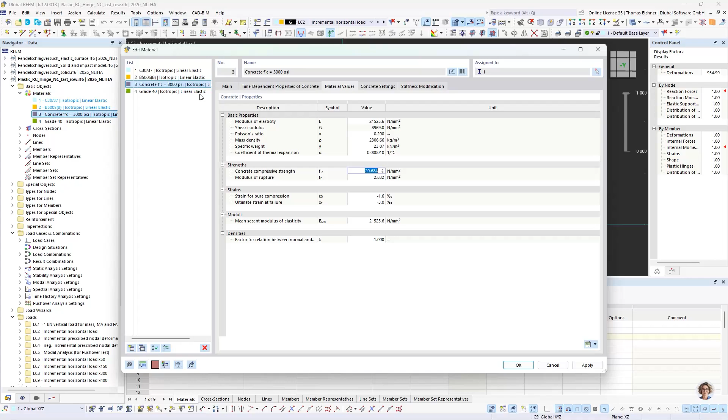We see here the material value for ASCE is FC bar. We have this 20.684. You can also make it user-defined and change it there. I think there are no estimated values there yet, so this value is the one that is used. For Eurocode material, that's a bit different. It's gonna use the mean value, because it's the European estimated value, kind of. Even though the formula is quite awkward, it's just 30 plus 8. So if it's really the estimated value, I adopt it, but yeah. I'm just not knowledgeable enough to say that, to be honest.

Okay, but anyway, here for the hinges, the FCM is used and not the FCK. So the general rule is if there's a mean or estimated value, it should use it. If there's none of that, it will just use the standard value. Okay, and that's about it. Then maybe one more thing, even though we are a bit over time, I'm sorry for that.

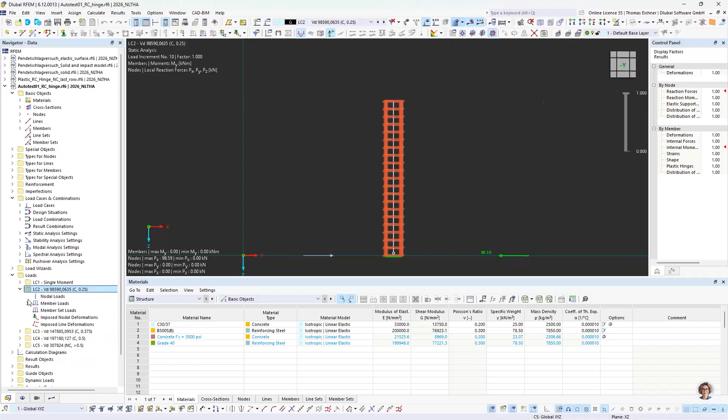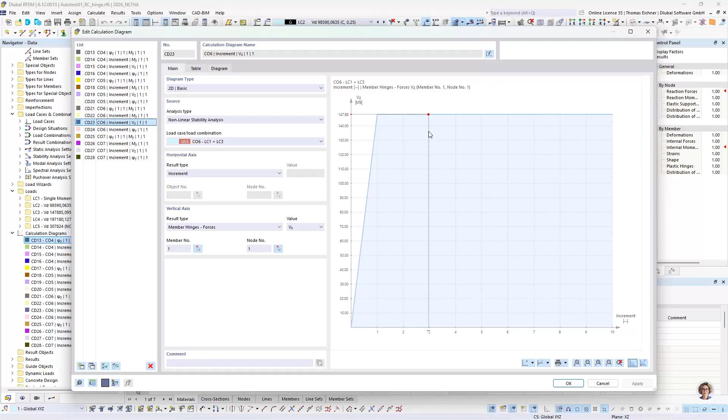Let's go for our automatic test. That's something different, because those hinges are special on, well, on their behavior. There's always, as you can see, I did several load combinations. The difference is I changed the shear force, and the shear force for the first one is, for example, 308. For the second one, it's gonna be 99. For the third one, it's gonna be 148, and so on. So this test investigates different shear forces for the hinge.

And I selected, this is kind of part of our automatic test system also. Well, it's a bit more complex than our automatic test system, because in the automatic test system, it is even reduced in the calculation. Within here, we just calculated some points on the most top part. Then you see here 0.005 to 0.01, it drops to this 20% residual strength. And at this 0.01, to this a bit higher, it will drop to 0.

V is the design shear force from NSP, so for pushover or time history. It uses the actual shear force for its behavior. That means the hinge behavior also is iterative, which is kind of one more non-linearity and makes it quite complex. But it's working. That's quite cool.

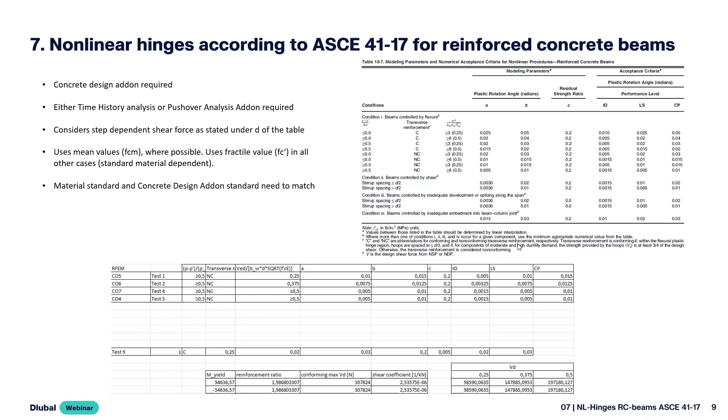And let's go for the last thing, and that are just some tips for the nonlinear time history. One thing is the nonlinear solver is kind of gifted for the time history add-on. No additional purchase is needed. Everyone who has the add-on already can just use it, so feel free to try it.

Then we have a warning implemented if something is not within our automatic tests. So as soon as the warning is there, just use it with caution and use your engineering judgment. Then, the big benefit is we didn't want to block any feature, so everything is possible, even though it is not recommended for all combinations, to be honest.

So that's the next tip from myself. It's something I call the Bausteinprinzip, modular principle, in here for the validation, because in RFEM 5 I got lots of customer models which just had tons of non-linearities mixed, and they just said it's not converging. That's quite hard to investigate, where's the problem with that. So please insert one non-linearity or one problem after each other and investigate its plausibility. Because otherwise you're just stuck with tons of calculation time or convergence issues, and it's going to take more time than building it up like that.